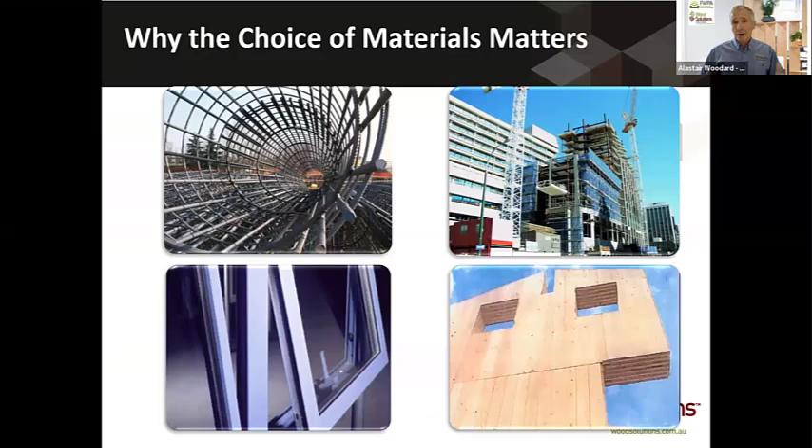So this question, why wood? Look, we're all building professionals. We all use a wide range of building products: steel, concrete, aluminium, brickwork, and of course, timber. And all of these products have one thing in common. They come from our one earth, and we really do only have one of these. And look, reality is in first world countries like Australia, we really do produce a lot of materials. We probably need, the pundits will tell us, 3 earths to actually provide the sort of consumption that we do at the moment. And that has an environmental impact in a range of different ways.

But I guess the thing that's taken the focus globally is this impact around carbon dioxide or CO2 emissions. And the building product sector is an important sector in terms of its environmental impact. Uses around 12 to 20% of water consumption, 25 to 40% of energy use, produces 30 to 40% of greenhouse gas emissions, and 25 to 40% of solid waste generation.

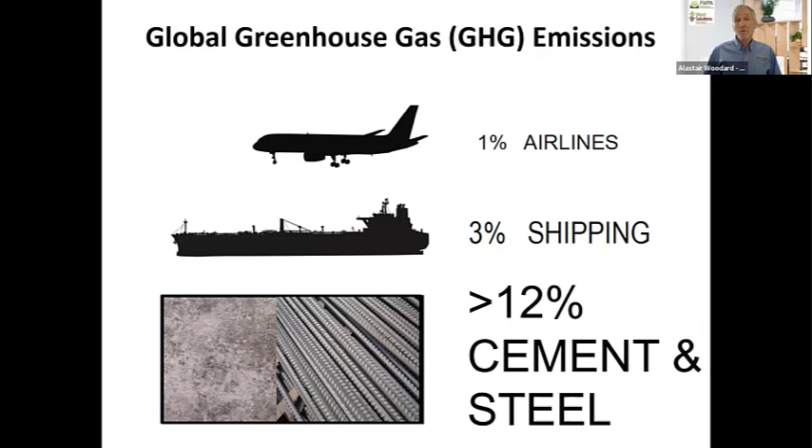It's interesting when we put some of this greenhouse gas emission in perspective. The airline industry is often bagged a little bit for its emissions, but it only produces around 1% of global greenhouse gas emissions, shipping 3%. The cement and steel sector alone produces 12% of global greenhouse gas emissions. So how we build is really important. And definitely in terms of a friendlier way we can do it, the use of bio-based materials such as wood is certainly a good option. As we know with wood, it's natural, renewable, biodegradable, recyclable, sustainable, and greenhouse positive. So it's definitely got a lot going for it.

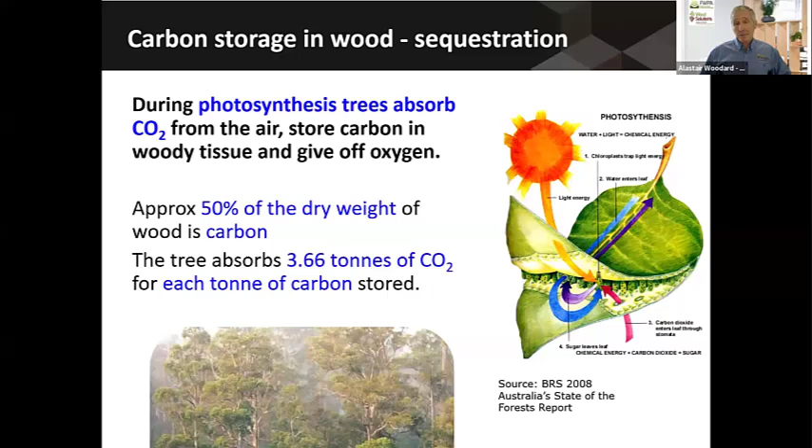You probably remember back to your high school science and the concept of photosynthesis. So what our forests and our trees do is they take that CO2 in the atmosphere, and using the solar energy of the sun, those leaves break down the CO2, they release the oxygen that we breathe, and they store that carbon in the woody mass of the tree. So about 50% of the dry weight of wood is carbon. So by example, if we use a hardwood that has a density of around 1,000 kilograms per cubic metre, around 500 kilograms of that is carbon. And if you multiply that by 3.66, that's how much CO2 is stored. So we really have a good story when we look at this timber and carbon cycle.

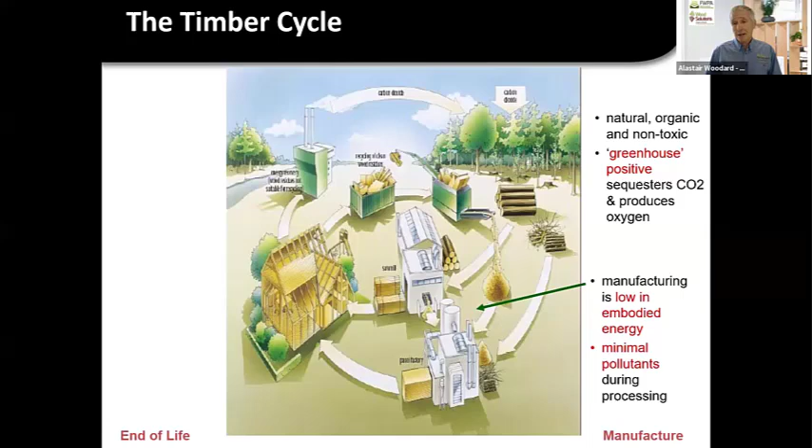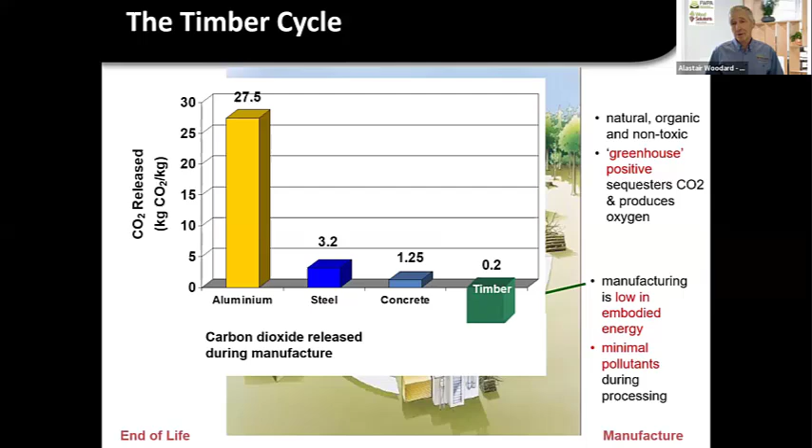As we mentioned, the forests are very greenhouse positive, sequestering that CO2. In terms of the production of timber, for most of you who've been to a sawmill, you'll see that they don't use a lot of embodied energy, very minimal amount of pollutants during processing. If we compare timber with other alternative materials, competitive materials, you can just see quite clearly by these graphs how much CO2 is released. And again, if you take into account the fact that those forests are storing that carbon, we really get a very different aspect compared to other materials.

But the other thing that people often overlook, but important to remember, is that those timber products continue to store carbon for their life. So if they go into a house, that house might last for 50 years, 70 years, 100 years, I don't know. There's plenty of timber buildings around the world over 1,000 years old. So as long as those products are being used, that carbon remains stored. At the end of that first life, when we deconstruct the building, we can do a couple of things. We can either reuse the products directly, like timber flooring or windows or doors, or we might recycle that into some completely new type of timber product.

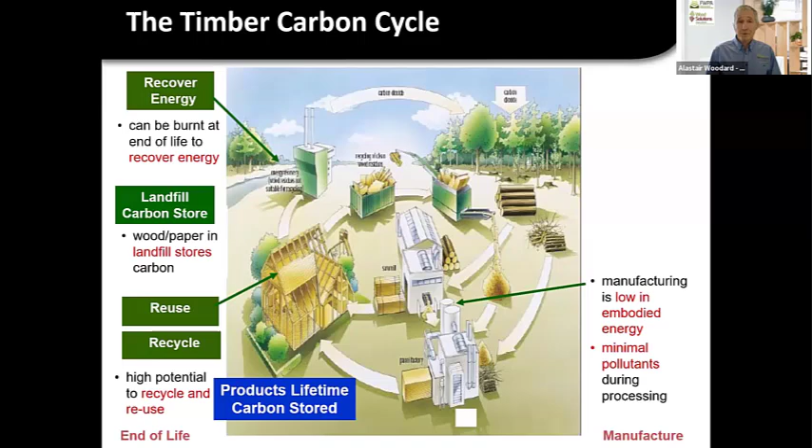And if at the end of the day we can't reuse or recycle it any further, we can do two things with that timber. If we actually store that timber in a landfill where there's no oxygen, that carbon will remain stored forever. It needs oxygen to biodegrade. But we really probably don't want to be sticking things in landfill. A better solution at this point in time, if we can't reuse it or recycle it anymore, is to actually burn that wood as a cogeneration fuel. So displacing a non-renewable fossil fuel like coal and using a renewable fuel instead. And that CO2 that's produced that goes back to the atmosphere is then reabsorbed again by the trees. So we get this really nice carbon cycle where the carbon's just cycling through different types of applications.

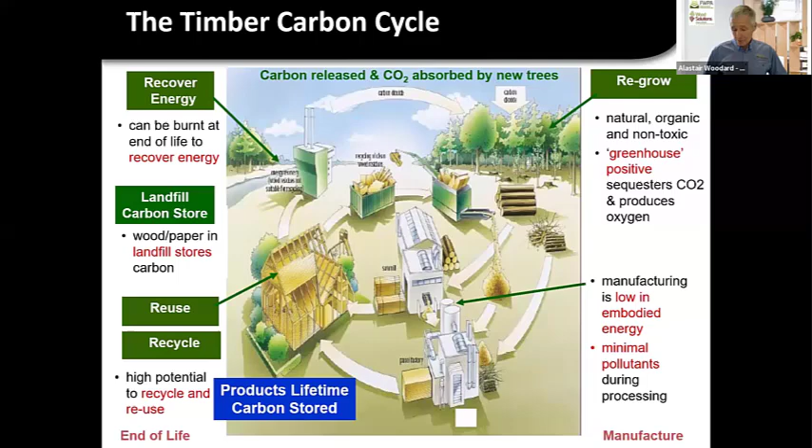Now, there's a massive interest at the moment in the embodied impact of materials. As you probably know, the federal government's got a net zero by 2050 policy in place. That's their aspiration. And there's whole different groups trying to work out how they assist with that. Certainly building is a big area.

So the building ministers met just last month, and they've actually all agreed that by NCC 2028, they want to include embodied emissions impacts of building materials, which is really fantastic. And that'll happen probably in the commercial sector through NABERS and the tools that they've got, and in the residential sector through the NatHERS scheme that we use at the moment.

And I'm sure a lot of you are aware, if you're interested in this area, that there's a whole range of other organisations, the Green Building Council, ASBEC, a whole lot of voluntary organisations that are also very focused on embodied impacts of building materials. A lot of you are probably also aware of MECLA, the Materials Embodied Carbon Leaders Alliance, which has brought together all of the major companies in the commercial and a lot in the residential sector to focus on driving down embodied carbon in building materials.

And they have a series of different working groups. And one of those is actually specifically looking at engineered timber. So if you're interested in this, feel free to join up. Also, WoodSolutions has got a number of good documents you might be interested in. Technical Design Guide number 55 in particular, I'd encourage you to download. And if you want some more information around carbon and forests, FWPA have also got a number of good documents there, all available from the WoodSolutions website.

If you're a bit of an embodied emission aficionado and you want more information about it, WoodSolutions also now has a database of all the timber-related embodied emission data. They pulled that together from all of the different environmental product declarations into one source. So please have a look at that too if you have any interest in this area.

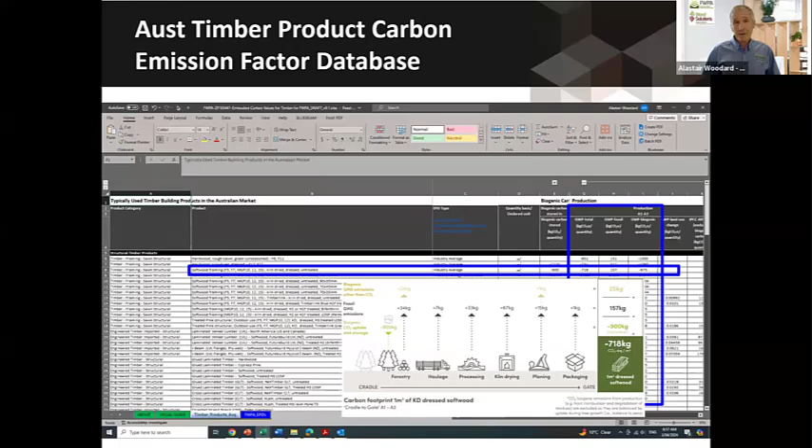But look, we're looking at new systems and new opportunities. It really is all about engineered wood products going forward. And this is a nice little quote from Alex de Rijke, who was head of the School of Architecture over in London: if the 19th century was the century of steel and the 20th the century of concrete, then the 21st century is about engineered timber. And this interest in embodied emissions is really driving a lot of this interest at the moment.

At a high level, we can separate our engineered wood products into these 5 different categories: those produced from solid wood, veneers, strands, particles, and fibre. Our solid wood products tend to end up in things like framing material, beams, columns, those type of applications, maybe the lightweight area. And then we also have our mass timber systems.

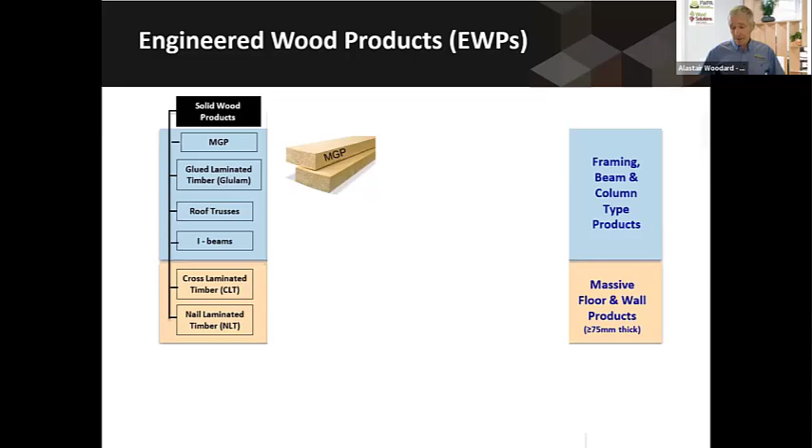Under our solid wood products, obviously our machine graded pine, which is used in probably all our lightweight timber framing. And every stick of this is really engineered. Every stick of timber produced goes through a proof testing machine before it's stamped and graded and sent to the marketplace. That MGP in its sawn form can then be used by the frame and truss sector to produce roof trusses, open web joists, those type of things.

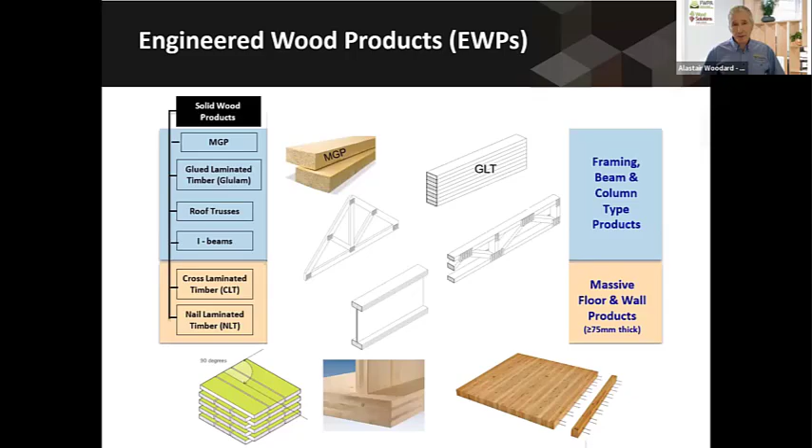We also use that type of product to produce bigger materials such as glue laminated timber, or even use it in things like I-beams. And with our mass timber products, it's not just about CLT, there's also other things like nail laminated timber. I'll cover a little bit more of this shortly, but our other speakers are certainly going to talk about some of these different products that are out there.

With veneered products, our main one from a structural sense is laminated veneer lumber, which is produced in sheets up to around 1,200 millimetres deep for billets, so we can cut all different sizes out of that depending on the application. Also these days you can get cross-banded laminated veneer lumber if you're using it in big panel sections, to give it some level of stability.

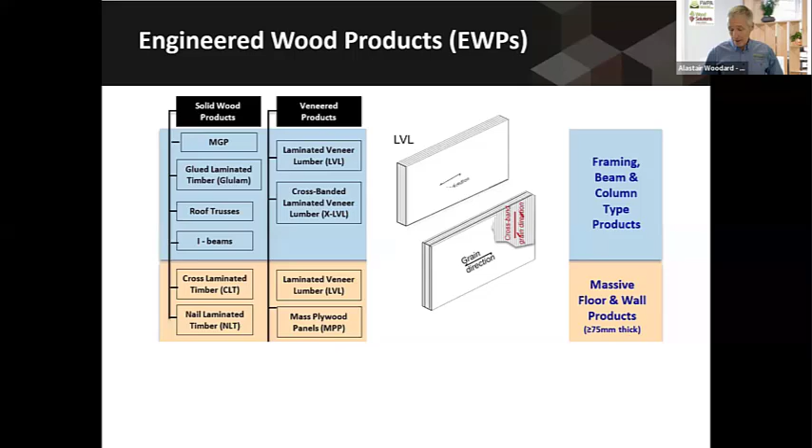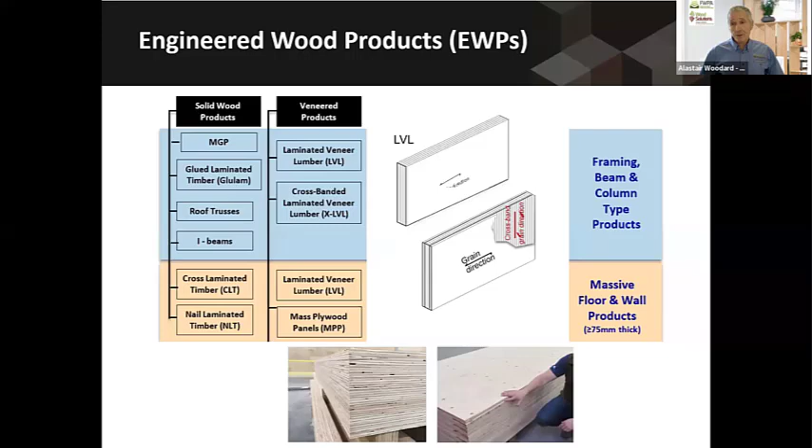And then quite a bit of interest these days right around the world, but particularly also here in Australia, around mass plywood panels as an alternative to some of the mass systems such as cross-laminated timber. And then look, there's a range of different strand products which are really interesting. I'm not sure how many of you have come across parallel strand lumber.

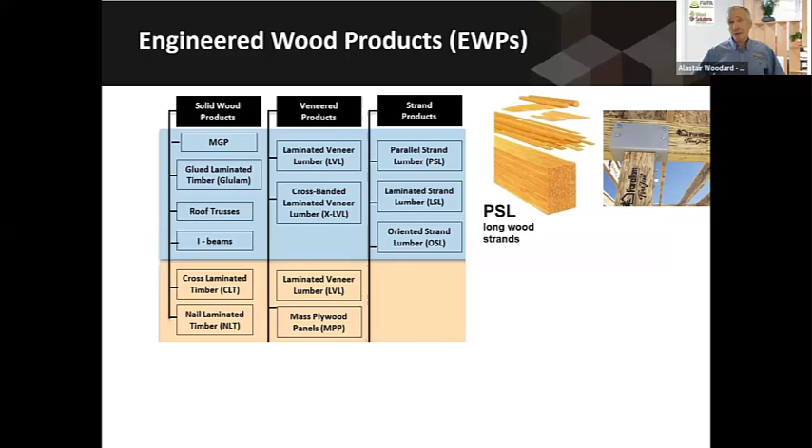This was interesting because this technology was actually produced in Australia back in the late 80s, a product called Scrimber. I don't know if many of you remember that one. It was produced by SATCO, the South Australian government, but we couldn't commercialise it here in Australia back then. And this technology went to the US, where it's now marketed as a product called Parallam, where these sort of great big engineered wood products are available. So basically crushed fibres all glued back together.

There's also, in terms of the different strand lengths, 2 other products: laminated strand lumber, which uses more short wood type strands. And again, we're developing some of that technology in Australia here through a company called Lignor. And then there's a product that uses flaked oriented strand lumber. So 3 different strand type products, which are more used overseas, but I think we'll see coming into Australia over the next few years.

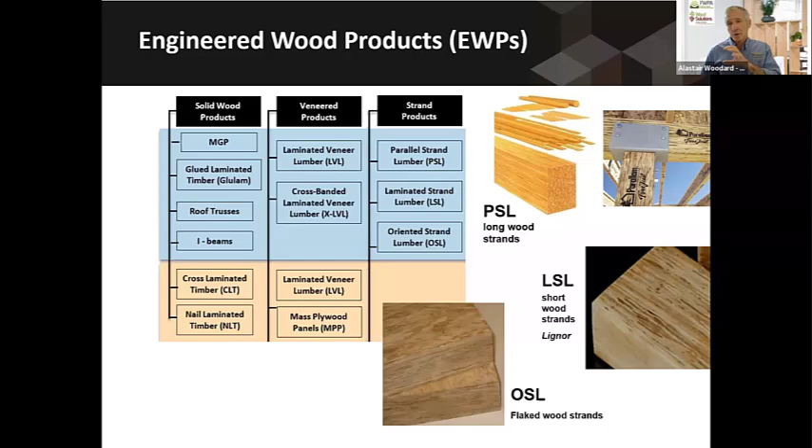And then in terms of our panels and bracing type products, obviously plywood is one we use quite regularly, but others you might not have come across, or you're starting to see, are things like oriented strand board. So again, sort of flakes of timber all laid up in specific layers to give a panel type product. And then obviously products with different types of particles, things like our particle board flooring, the yellow tongue, or the finer particle in products like hardboards and fibre boards.

So looking at supply, that's quite interesting. We've probably got a fairly convoluted downstream supply channel that includes both local production and imports. These days, in terms of how that comes to the market and looking at some of these applications where the product ends up, certainly with our detached 1- and 2-story homes, which is where a lot of our timber goes, a lot of builders still choose to stick build on site.

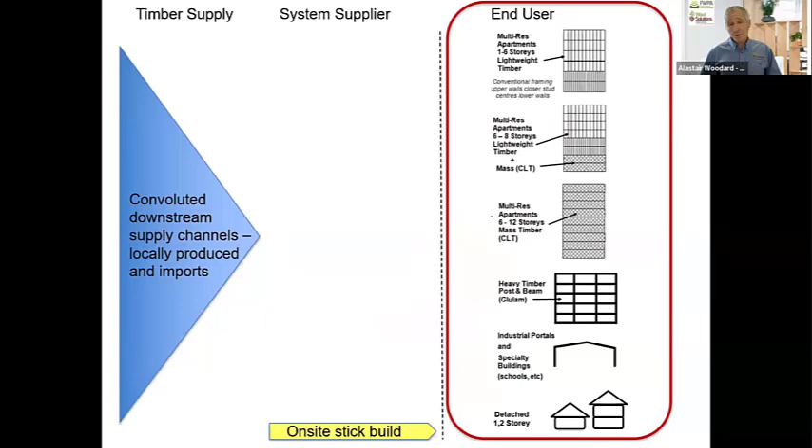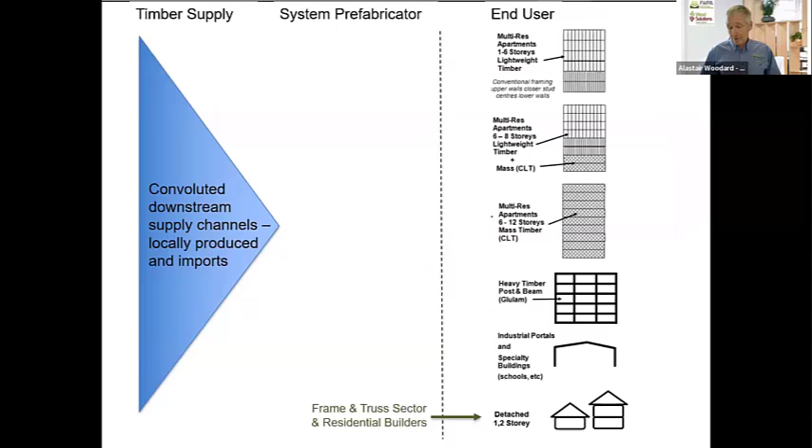But the push really is across all of these type of applications these days to some type of prefabricated timber system supply. And so when we look at these again with our detached 1- and 2-story market, that can either be a residential builder, sort of stick building on site, but predominantly these days materials supplied from the frame and truss sector. If we're looking at different end user products such as industrial timber portal frames or specialty buildings such as schools or heavy timber post and beam structures for offices and things, that tends to come from specialty timber fabricators or the glulam manufacturers.

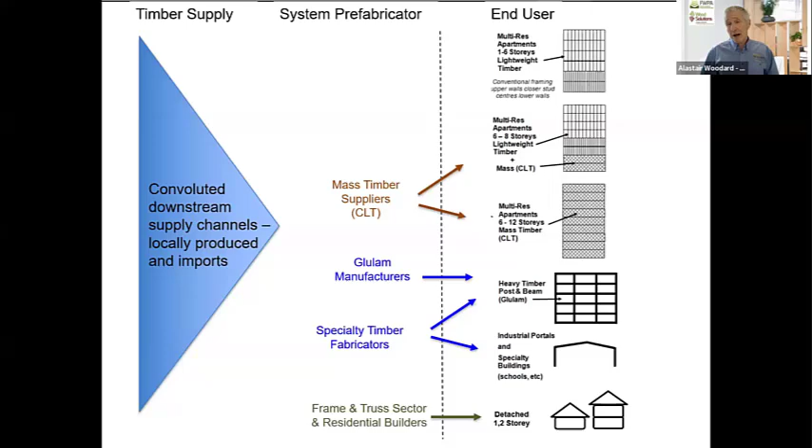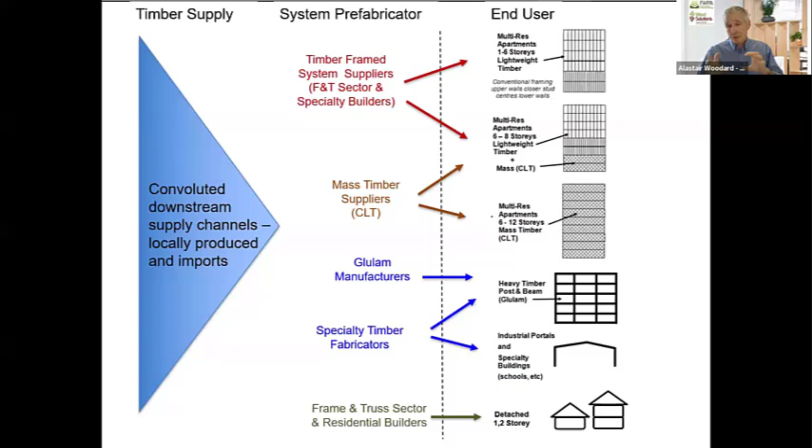Then as we move into our multi-res apartments, so the taller ones, 6 to 12 stories or more, that will tend to be supplied by the mass timber suppliers. And if we're talking about a lower level apartment that might be, say, up to 6 stories, where lightweight might be more effective, that can either come from timber frame system suppliers within the frame and truss sector or from specialty builders. So different ways these different products come to market.

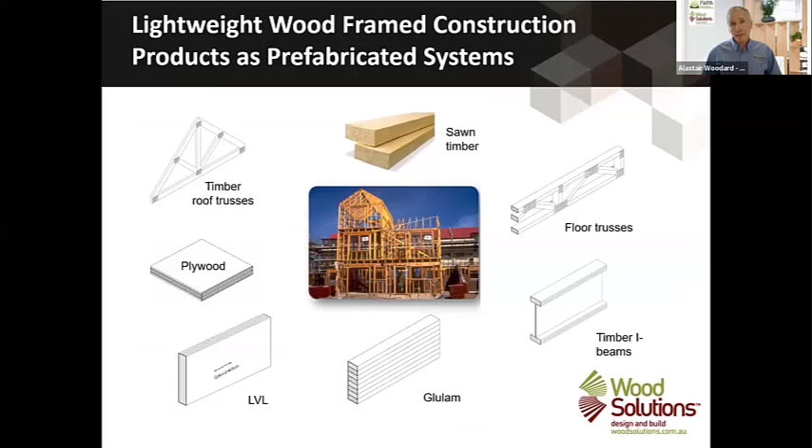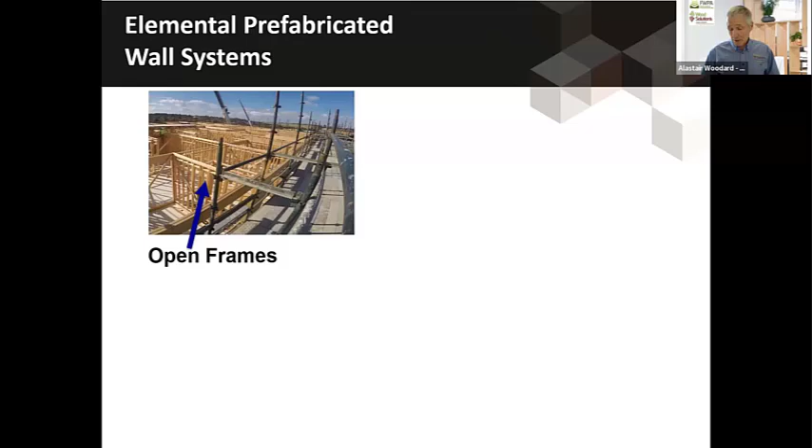So quickly then, just sort of looking at some of the different products out there, we spoke about all these sort of individual products that you can get these days, but these days they're really supplied more as prefabricated systems. So if we're talking walls, for example, we often talk about this elemental prefabrication. So we could be taking a basic open prefabricated wall frame that we build most of our houses and townhouses out of, and we might start to add elements to that. So we could be adding the vapor barrier in the factory, we could be adding the windows in the factory, could be adding some sort of sheathing.

And that is just sort of making it simpler, improving the productivity for builders in terms of the speed of construction on site. Or we could be doing fully closed prefabricated walls where you've got an external cladding and internal lining and maybe even electrical and plumbing; walls can be supplied these days.

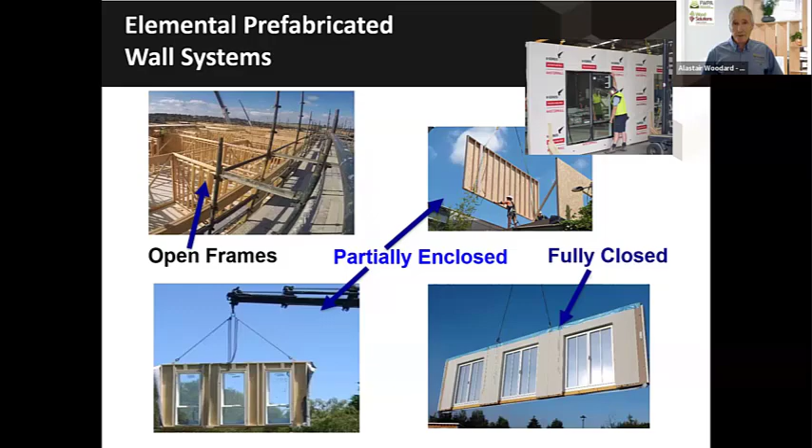The real benefits are how quickly you can install these systems. So particularly for townhouses and apartments where you're getting repetition, very cost effective and speedy, and really does reduce that sort of risk of fall from heights for workers. So a really good OH&S benefit as well.

In terms of roofs, we also obviously supply a lot of open roof trusses, both to the commercial and the residential sector, but there's no reason also why we can't do roof cassettes if we need to get that speed of construction on site. You see a lot of cassettes used overseas, particularly in countries that have short build periods, but we do certainly also see roof cassettes used in Australia.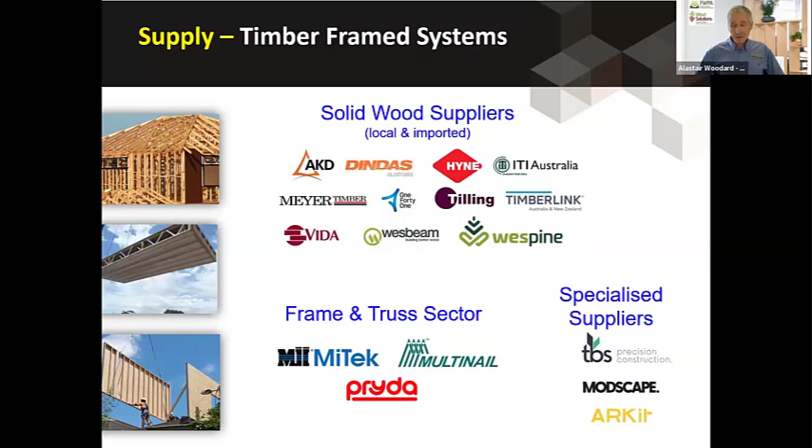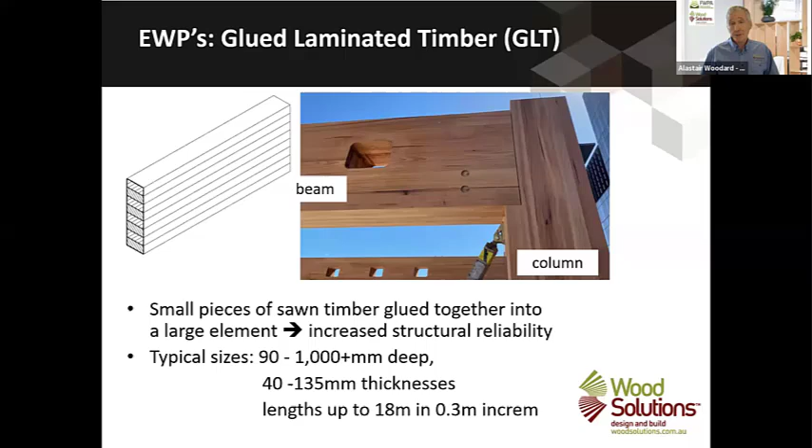In terms of our mass wood frames, so particularly glue laminated timber, in effect, what we're doing here is taking small bits of wood, maybe finger joining them together to make them longer, gluing them together to make deeper. These days we can get glulam beams in Australia up to around a metre deep, so really quite substantial. I know Jeremy and Chris are both going to talk about this coming up, so I'll leave them to speak about their respective products. But in effect, there's a range of different glue laminated timber grades out there, and generally that's dependent on the species they're made out of.

In terms of supply of glue laminated timber, we have quite a range of Australian suppliers now. And as I say, Next Timber and Ash will be talking about some of their products today, and a range of different importers that all supply glue laminated timber now into Australia.

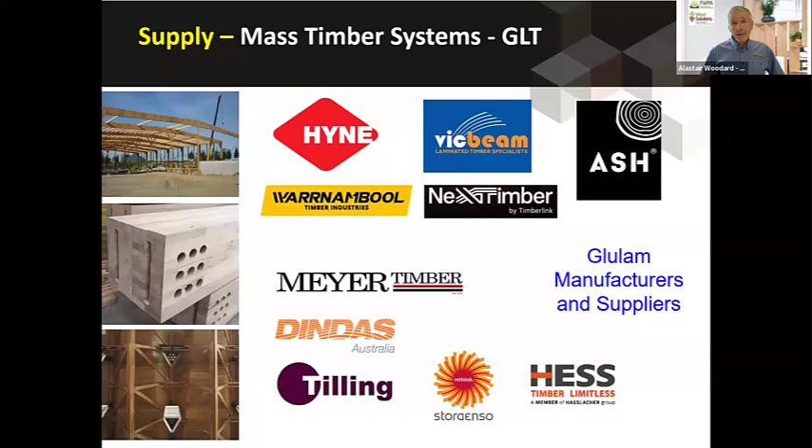Timber concrete composites is another really interesting area, and Chris is going to chat a little bit about a product that Ash is producing here. But in effect, what we're doing is, from an engineering perspective, trying to get the best out of 2 different materials. So when we do mass timber buildings, or mid-rise timber buildings, one of the benefits of concrete is its acoustic performance because it's quite dense. So when we're doing those type of buildings, we can use a timber concrete composite to actually reduce some of that acoustic issue and control some of that vibration. And at the same time, we get the benefits out of the compressive strength of concrete and the tension strength of timber. So quite creative ways of mixing materials for the best application.

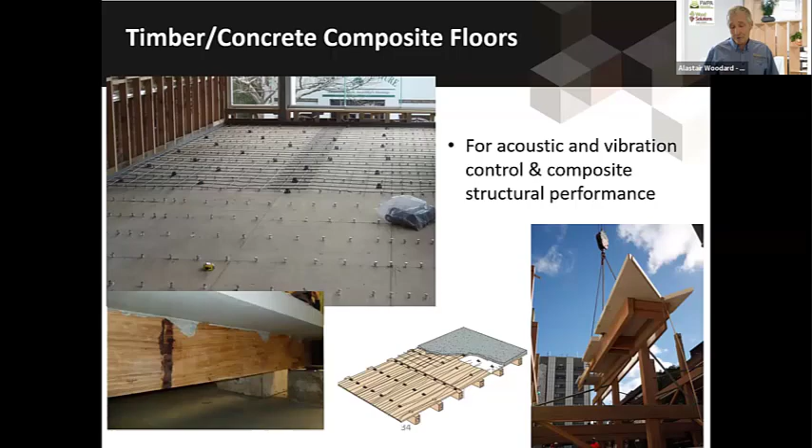In terms of our mass wood panel systems, the NCC describes anything over 75 millimeters thick as a mass panel. So that could include laminated veneer lumber, cross-laminated timber, nail-laminated timber, or dowel-laminated timber.

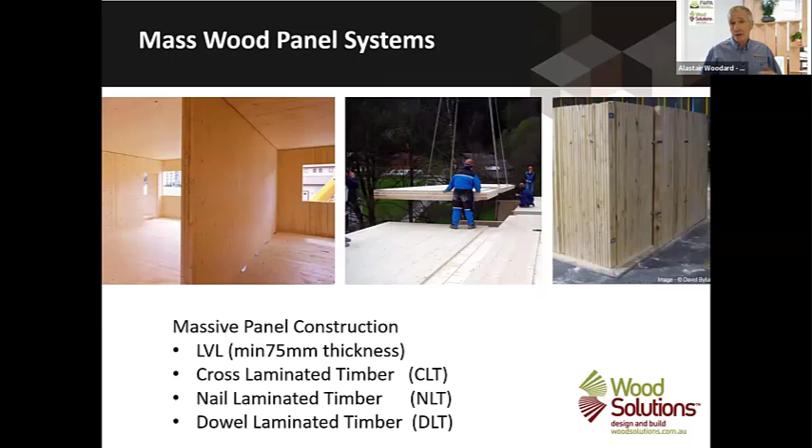And in terms of supply, we have 3 major manufacturers now producing CLT in Australia, which is great. So XLAM has been around for a little while now, Next Timber, which is now in the market, and Jeremy will talk about that shortly. And then also CLTP Tasmania that produces a hardwood plantation CLT product. And again, a number of different importing companies from Europe and then more so these days from North America. So a range of ways you can get CLT today.

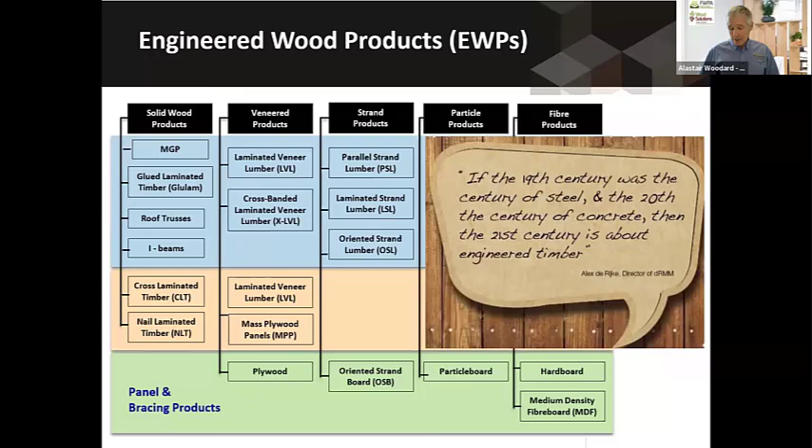So as you can see, there's a whole range of different engineered wood products out there at the moment for you to choose from. If you want to get some more information about all the different products, I'd certainly encourage you to have a look at WoodSolutions Design Guide number 46. This is freely available from the WoodSolutions website. Just grab that. It'll tell you all the types of products and where they're used, and has some great little comparative span tables in there for some preliminary sizing.

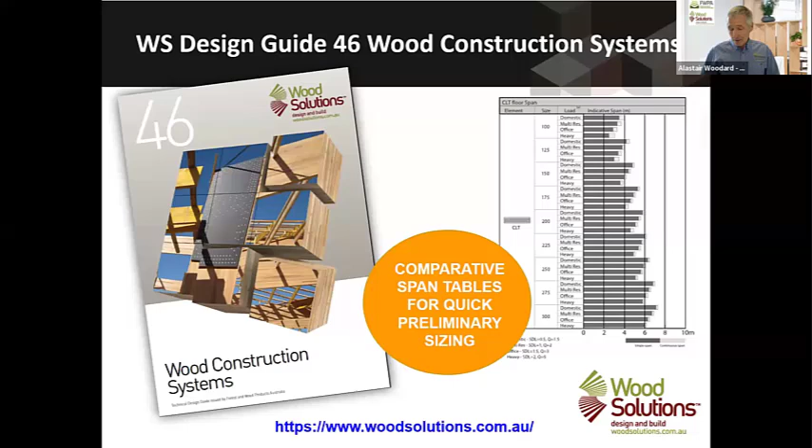So that was a very quick introduction, and what I might do now is stop sharing my screen and hand over to Jeremy, and he'll take it from there.

So I just want to quickly talk about market trends. So with regards to the CLT market, the US market is expected to double in the next 5 years. We've actually seen similar trends in Europe as well.

So I think this is sort of emphasising the rise of demand for buildings with low carbon footprints. And there's also a bit of a growing demand for more advanced adhesives in this space. And we're starting to see some of these trends creep into Australia.

So I'll just start by introducing who Timberlink are. We are primarily a softwood manufacturer. We've been in existence for about 10 or so years. We've got a plant in South Australia and in Tasmania as well. The Next Timber plant is actually located just out of Mount Gambier in Tarpeena. And we have distribution centres all across the southern states of Australia, as well as some in New Zealand too. The products we primarily have sold to date have really been around the framing market.

So we started off as a softwood framing business 11 years ago, and we started producing engineered wood products middle of last year. The genesis for this was really around the responsibility for us to make best use of fibre and residues within all our timber products. And we actually commenced commercial operations of our wood plastic composite range in addition to CLT earlier this year. But I'll predominantly just talk about CLT for the remainder of this brief presentation.

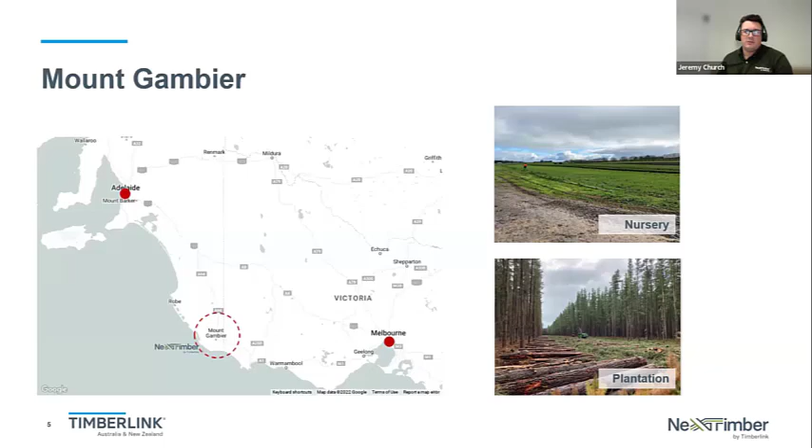Some glitches here, Alastair. Okay, back up running now.

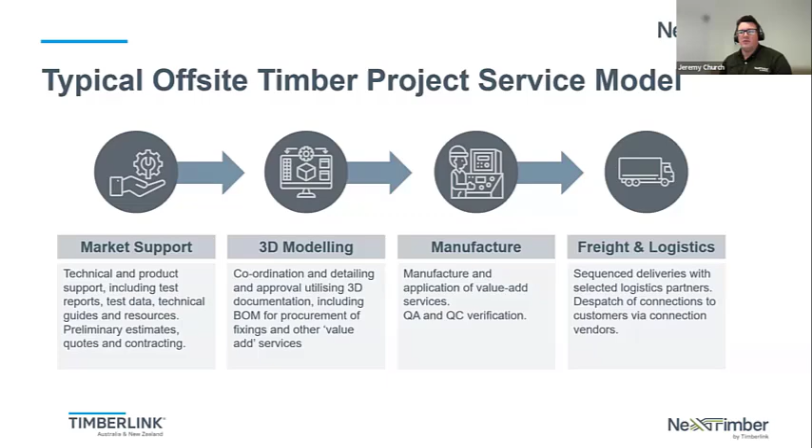So let's run through quickly what a typical offsite timber project service model looks like, irrespective of which manufacturer makes them. We provide market support. We've got sales engineers out in the market communicating with architects, engineers and specifiers to help them with their projects. Then we move to a process of 3D modeling, which we do predominantly in-house, and we'll develop a bill of materials for all the products, including screws and fixings or any other components we're supplying with the project. We then move to the manufacturing stage, and we also manage the freight and logistics to the site via various connection providers or third-party distribution partners.

We can make CLT panels that are 16 meters long, 3.5 meters wide, up to 360 millimeters in thickness. We edge glue our boards. We sand all our panels. And with our glue laminated timber products, we can make 12-meter long beams up to a meter in depth. We use feedstock widths ranging from 65 millimeters to 135 millimeters. We process them all through a planer, so they're all dressed all around. And we can provide them with or without arrises.

As part of our service model, we also provide the fixings, brackets, components, and any other value-add items the customer may want, which include things like temporary membranes and end grain sealers. The important point to note here is that all the offerings we provide may not be the same as what all other manufacturers provide.

So they do vary from supplier to supplier, particularly the value-add components. But even some subtleties around what lamella thicknesses manufacturers use can vary, same as board widths, whether they edge glue or don't edge glue, what types of adhesives they use, what grades of feedstock they use, but also things like certification, treatment, chain of custody. Those are all variable within the supply chain.

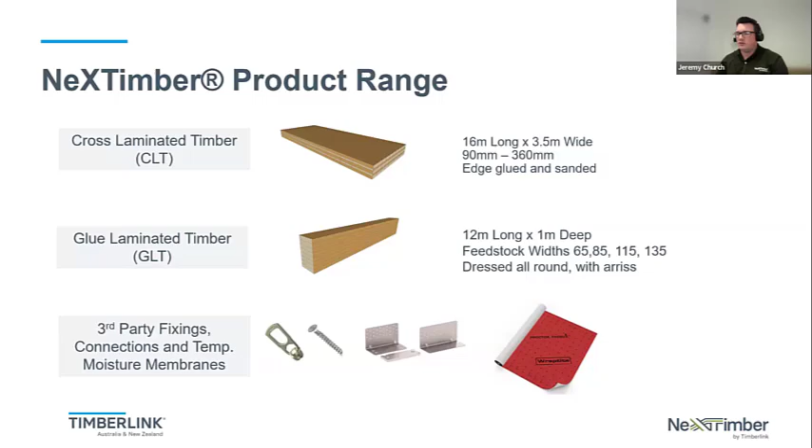So I dare say that if you're engaging with any supplier, just really probe them and ask them what the differences are between their products and the competitors', and make sure you're comparing apples with apples. One key difference for us as a manufacturer is the technology that we use. We use a melamine adhesive that cures under radio frequency, so it needs an energy input in order to activate the adhesive. So our press is a radio frequency press, a little bit similar to a microwave, but not quite.

We lay the boards up mechanically, so multiple layers, could be 3, 5, 7, or 9 layers, and we alternate the direction of each layer, and we apply a layer of adhesive between each layer, and then that goes into the radio frequency press, and it presses them in section by section as the actual CLT panel or GLT beam moves along. This varies from supplier to supplier. Some use it, and it's all really dependent on what type of adhesive they use.

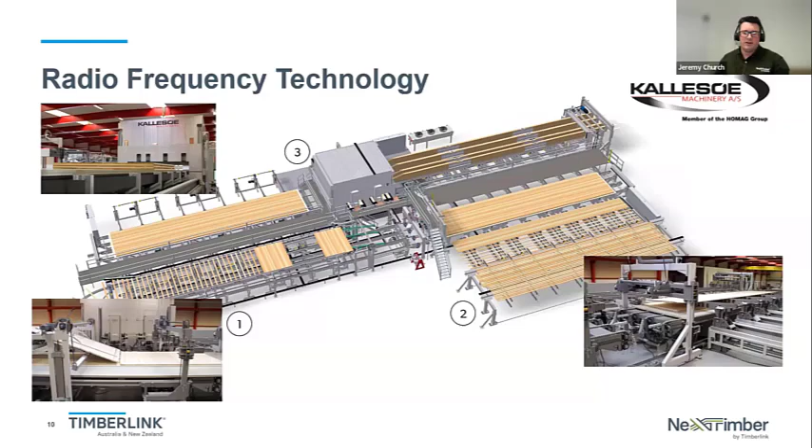What we do from a technology point of view is we have the ability to import models from third parties, or we can develop them in-house from engineering and architectural drawings. If we are importing, and this will be the same for most manufacturers, external models do tend to come with some challenges. The geometry is typically retained, but the translation of data can be a little bit clunky. So if you're going to generate your own models, run some tests and trials with your supplier before you actually go down that path.

It generally does require some rework and manipulation on the manufacturer's end, typically due to things like tool assignment, tool limitations, and what can actually practically be machined. So there may be some changes that need to happen there. Most manufacturers will prefer to do probably the last 50% of the detailing themselves. This includes things like putting in lifting points, looking after the loading drawings, any QA documentation. So if you are going to go down that path, be rigorous and get your scope right with your manufacturer first.

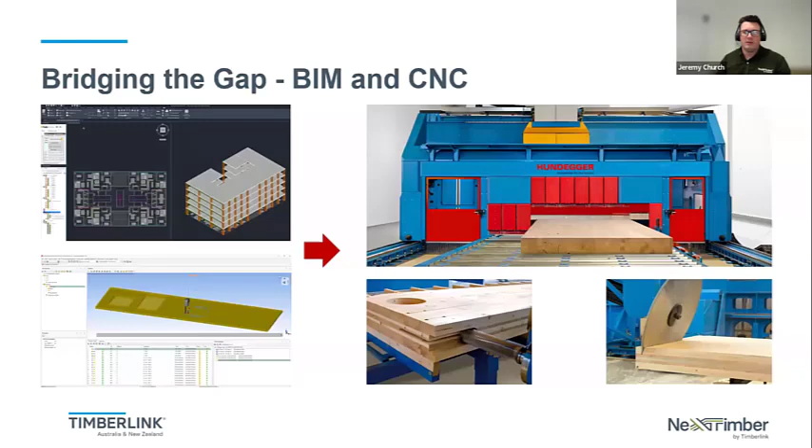When it comes to compliance, generally speaking, if you're going into large commercial applications, you're going to need certification with regards to fire performance. Our products have been tested through Warrington Fire, and we've got test data to support both products that are wrapped in fire-rated plasterboard, so encapsulated, or bare, where they don't have any fire-rated plasterboard on them. So we've got test certificates for both of those.

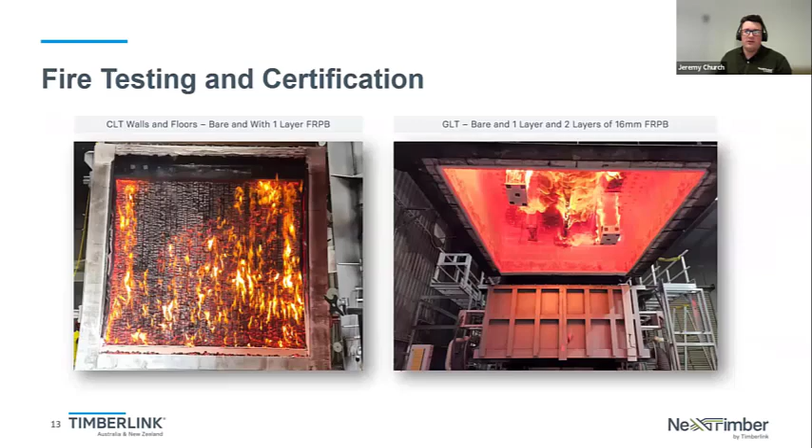But the point I really want to make is that with fire testing, not all things are created equal. Suppliers can't generally swap in one adhesive type or a better performing adhesive for another one. They're usually set up to deal with one, plus they won't necessarily have the testing certificate to justify substituting one in or out. The adhesive that we use is a melamine adhesive, which means it doesn't degrade at heat. So it gives you a product that won't delaminate as the fire gets through to the glue line, so it retains its glue line integrity.

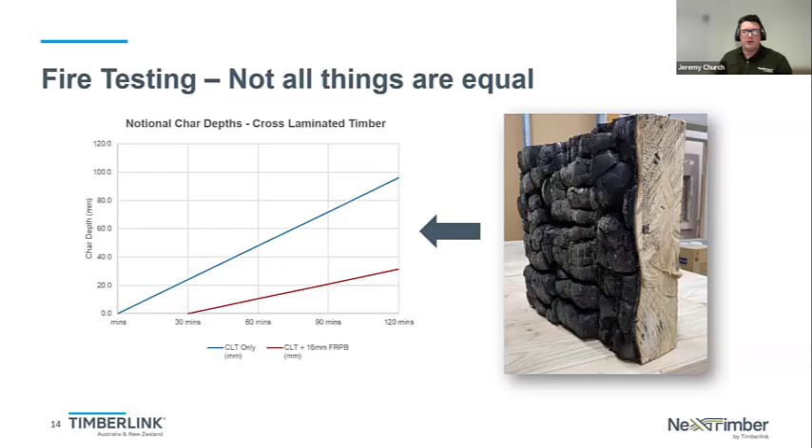Also, the lamella layups influence the overall fire performance, and those can also differ between suppliers. So engage with your supplier and look at their test data and what they have to offer in that space. With regards to fire performance, as I said, we have solutions with our fire plasterboard. We also have DTS and performance solutions up to 3 hours. And we also have tested passive fire solutions with some supply partners, so fire collars and fire stopping solutions and things like that.

These are accessible via design guides, test reports and test certificates, all available on our website. So if anybody needs those, feel free to reach out and download them. And with regards to acoustic performance, we've also spent a reasonable amount of time down at CSIRO in Clayton doing a whole bunch of testing with them.

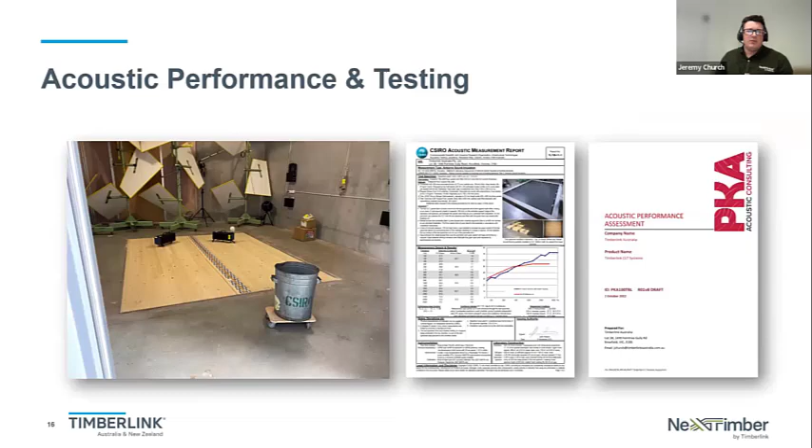Acoustic performance is typically critical for residential type applications. We've tested tens of different solutions in that space. They are available through our literature, through our guides, but we've really focused on having expressed soffits for CLT construction. So there's some solutions available there. Also, WoodSolutions Design Guide 44 has a whole host of solutions available, which are fairly generic and supplier agnostic.

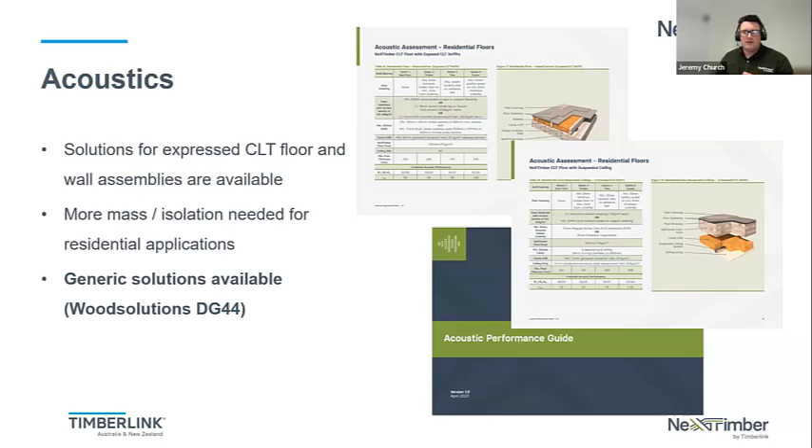But one thing I want to talk about with regards to CLT is some of the opportunities that really present themselves in the market. I started this presentation with a brief synopsis of what's happened in the US and European markets with regards to growth in those sectors. But I think there's a really big opportunity in the Australian landscape to look at how we actually leverage our existing supply chain. So we can use things like cross-laminated timber to partner with lightweight timber framing to build buildings that we would typically build in more traditional styles.

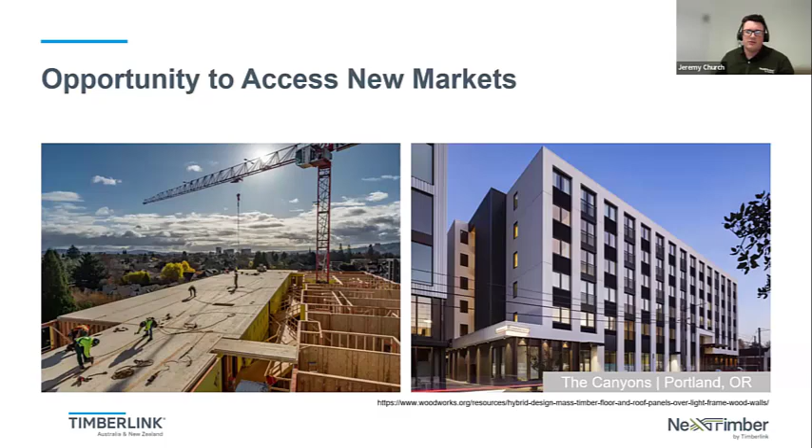In this example here, this is one out of Portland, Oregon. There's a whole host in the US. Lightweight timber frames, CLT floors, and it really is becoming the normal method of construction over there. So there's an opportunity for the Australian market to really grab this and embrace this technology. We can utilize the existing capabilities of the frame and truss market. We can also reduce the freight costs and CO2 footprint by building our wall frames closer to the construction site.

We've got supply partners with regards to frame and truss manufacturers and the connection suppliers, the nail plate providers, etc. Those are all very well established in the Australian market. We just need to pull it all together. Now we have two high capacity softwood CLT manufacturers in Australia, so this solution is somewhat supplier agnostic. They can already supply into this market segment. And we've got multiple frame and truss manufacturers very close to where the high density housing needs to be. So there's a really big opportunity for this segment to embrace what's happening overseas and bring it into Australia.

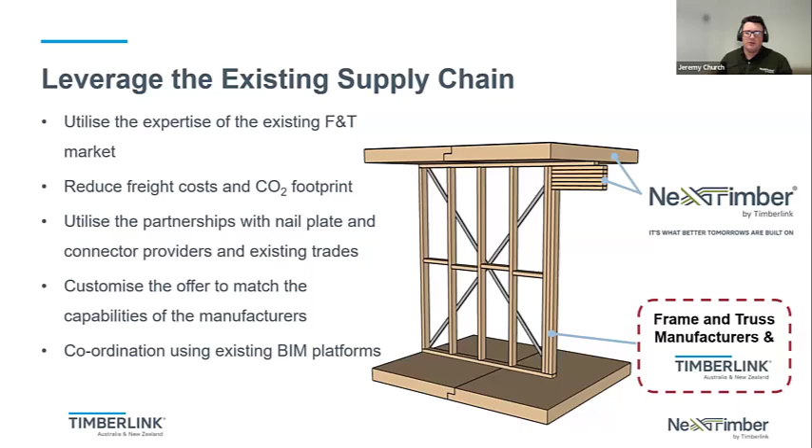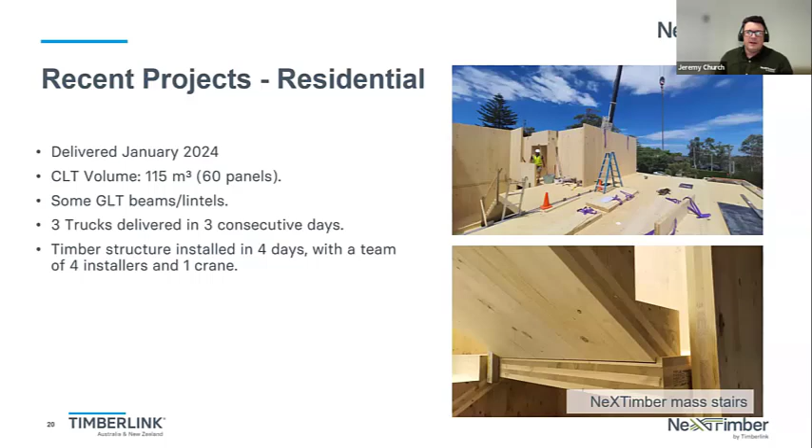If I look at some of the past projects that we've done, as I said, we started producing CLT panels and glue laminated timber products in the middle of last year. This year we delivered one of our first projects, which was a residential project in New South Wales. You can obviously build stairs, walls, floors, all those sorts of assemblies using cross-laminated timber. And we've also recently delivered a number of commercial projects and are in the throes of delivering a few more. This project here is quite interesting. This is one done up in Sydney.

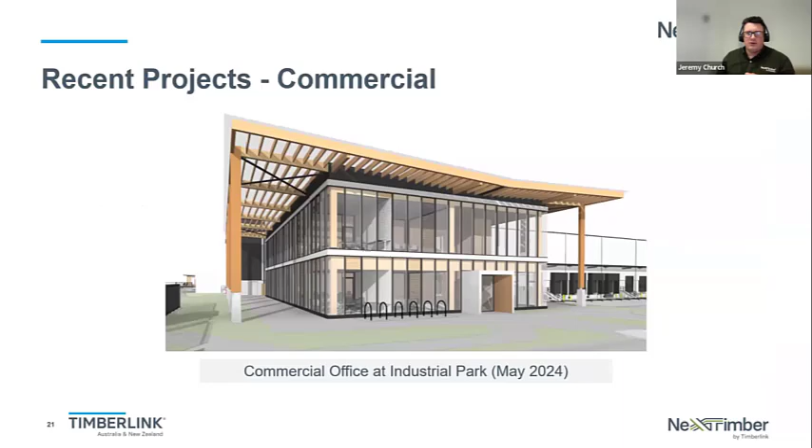It actually had three timber suppliers on the one project. We were supplying the cross-laminated timber, Ash was supplying the glulam, and Hyne actually supplied some of the glulam on the external facade. So we really played to the strengths of each of the suppliers to collaborate together and pull together a really good outcome for the client. It also had factory applied membranes and some of those other value add items to take a lot of that work away from the construction site.

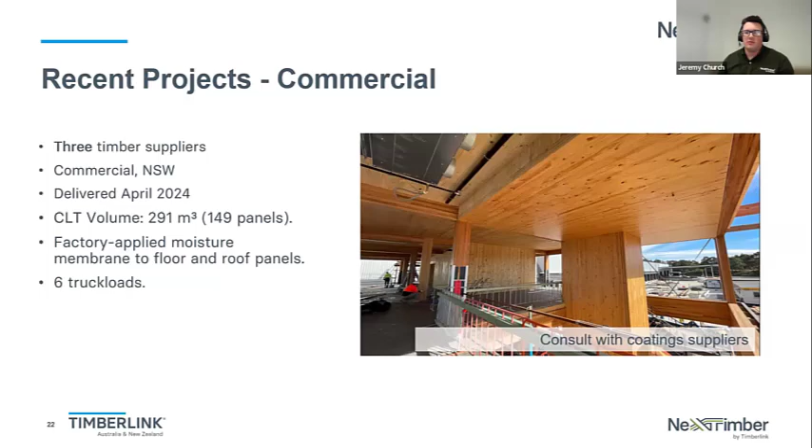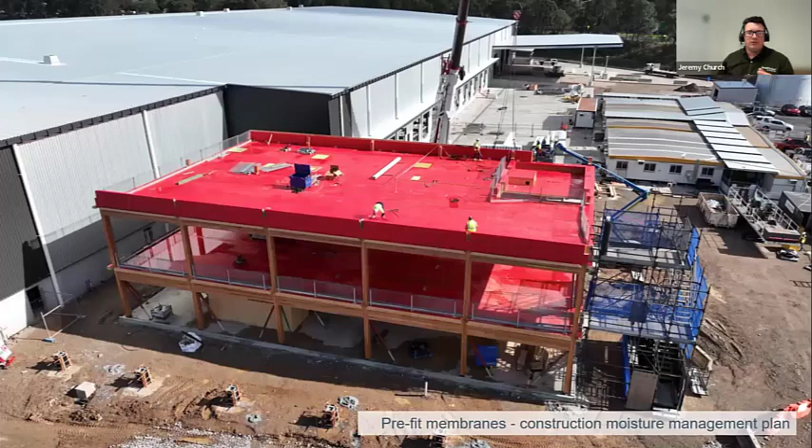A lot of collaboration and service coordination was required for a lot of these projects, as they always are. As I mentioned before, there's the opportunity to pre-fit some membranes to do some value add and really manage that moisture on site. That's becoming more prevalent these days with contractors really putting a lot of emphasis on protecting the timber. As a manufacturer, it includes the placement of pre-fitted temporary lifting solutions. That's usually coordinated through the shop drawing process.

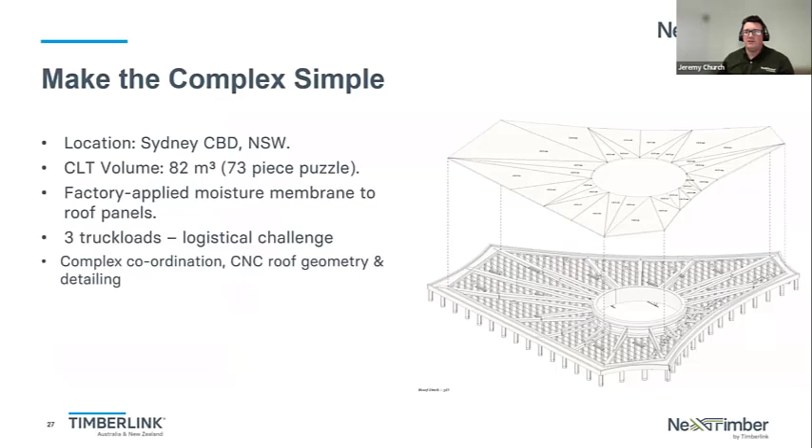And another internal image. Another project I'd like to talk about is a project up in Barangaroo, in Sydney. The emphasis of this one is really making the complex simple. The project went through a bit of a journey, but it really was about pulling together a bit of a jigsaw puzzle. It actually went together on site relatively straightforward, but it required a huge amount of coordination through the design team and through the shop drawing phase in order to get that outcome. So that's one that we're pretty proud of.

These are some of the panels that are going in. You can see the amount of machining that had to happen. We were actually able to apply some manufacturing principles in here to streamline that. Although it does look complex, we were actually able to simplify it.

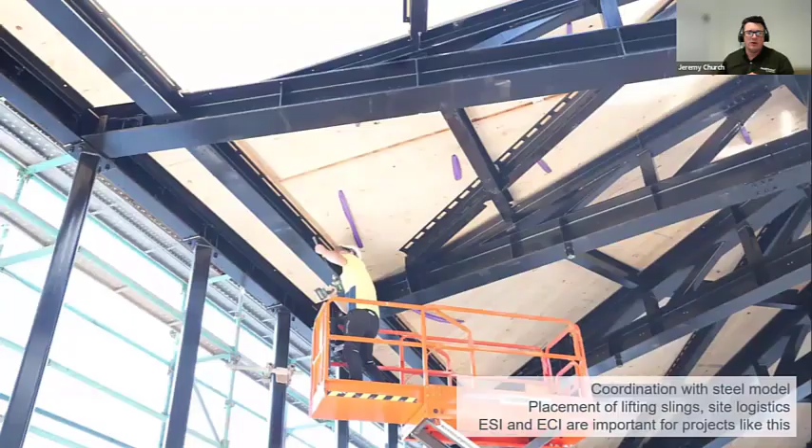So that required, as I said, input from across the board. And same with lifting points, we had to coordinate that with the steelwork too. So a bit of a challenge there.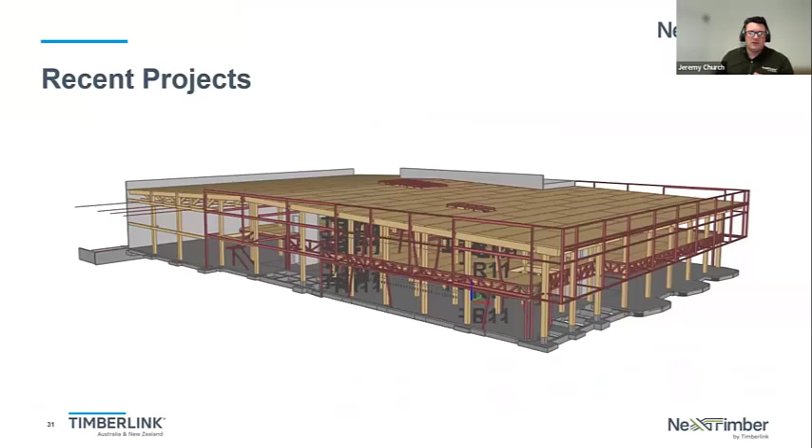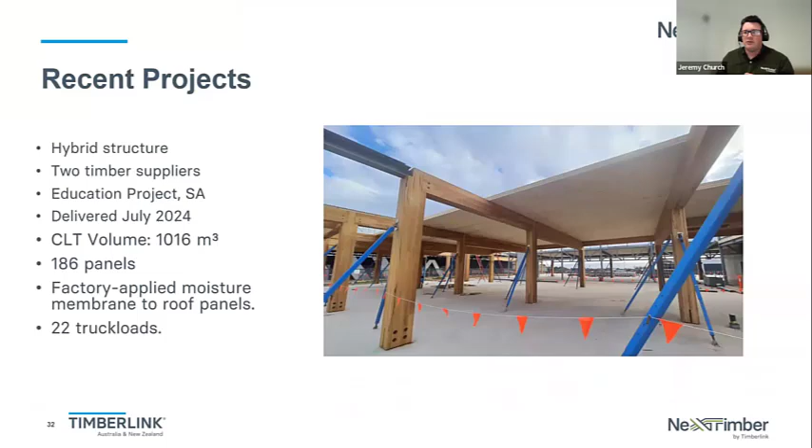This is another project that's going up in South Australia at the moment, a hybrid structure to some degree. It's got concrete, it's got steel, it's got CLT, it's got glulam, it's got a whole host of different things in it. It has 2 timber suppliers working on it together. So Ash are actually supplying the glulam, we're supplying the CLT. Once again, another high level of coordination and collaboration on this piece of work, which we're all very, very proud to work with. Some images there that we can see.

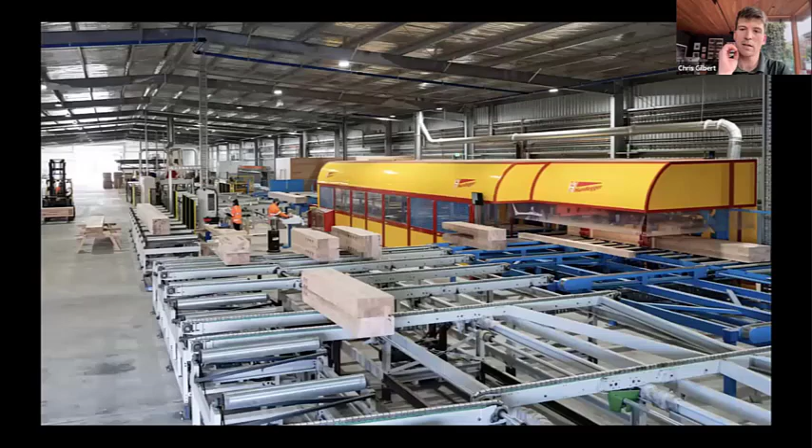This is one of our K2 Hundeggers. So this machine is over 30 meters long. It's really great at doing these, well, I'm going to say simplistic, but traditional kind of post and beam connections. We also have a new saw, which is a Robot Max, that really lets you unleash a lot of complexity, which is quite exciting.

So the products that we will talk about today: Masslam 33, that's just finger-jointed plantation hardwood laminated together. 38 is where we laminate in one direction, then the other. We use that for columns and beams. 33 we use for rafters and purlins. And then ATC is when we're combining all three things, so 38, 33, and concrete, to create a hybrid system.

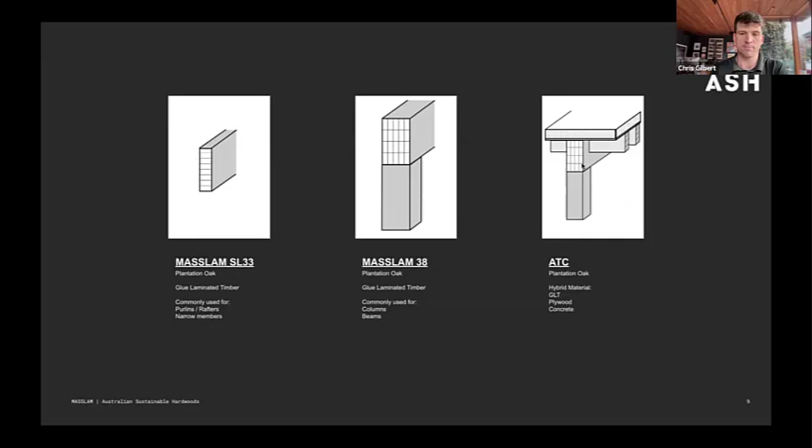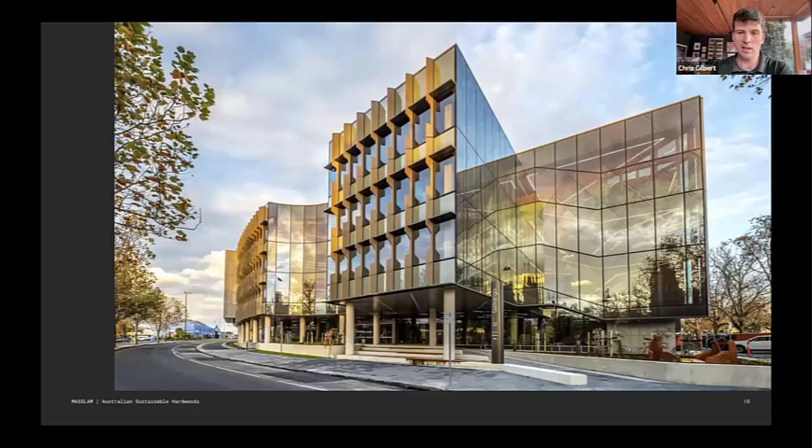So just a quick background of the projects that we've delivered with Ash that have used 33 and 38. So this is the Bendigo GovHub. This is a great project by Architectus, Macquarie University, Westfield Knox. And then I thought I would show some of the work that I've done with Ash. So this is a project called Off-Grid House. All of this is Masslam.

So Ash timber composite, I could talk all day about this. I'm quite excited by it. So this is a fully fire-tested solution. We can build up to 12 levels and expose all of the timber, and it's carbon neutral. And the timber that it is using has been upcycled from a plantation forest. So it's all good news stories.

So this is how it looks in the end. As I said, up to 12 levels. It's really traditional post and beam construction with exposed joists. But what we do is we supply it as panels, 1800 wide, with plywood on the top. And then we use shear connectors to attach a really lightweight mesh to the top of that, and then just pour 25 MPa concrete over the top.

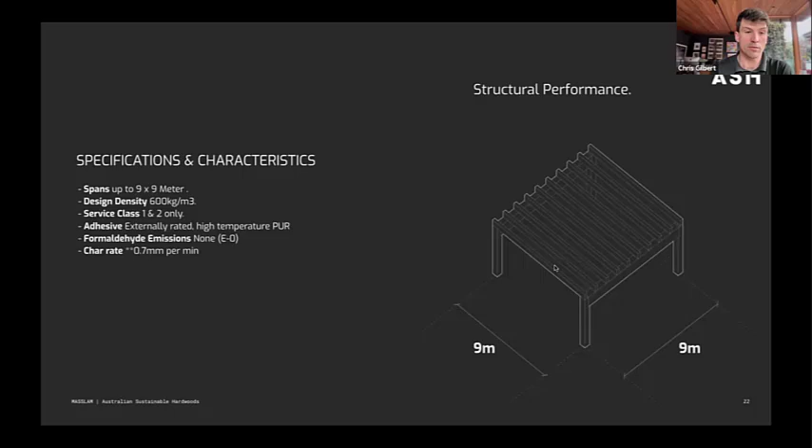When it gets into connections, there's a few different options. Obviously, simple supported is the most efficient, and that's what the images you've seen. And that's where we just land the joists on top of the primaries, and you can run services over the top. That's great. It's really efficient, but your floor to floors are higher. So when you start looking at residential and you've got that 3.2 meter height limit, floor to floor, let's say, or constraint, maybe this isn't so feasible.

So what we can do is we can semi-notch the joists into the primary. So that still gives you the ability to run some services over the top. Generally, you can run your duct for your range hood, that's 70 mil, 300 mil wide, duct over the top, because these are obviously at 800 mil centers. So you have 600 mil clear in between.

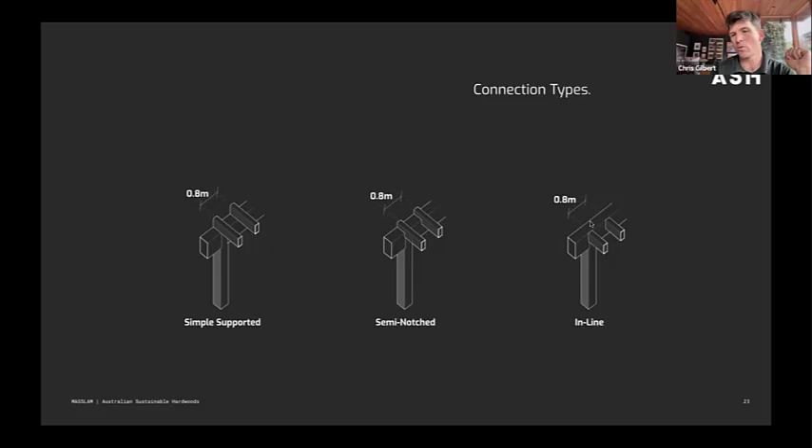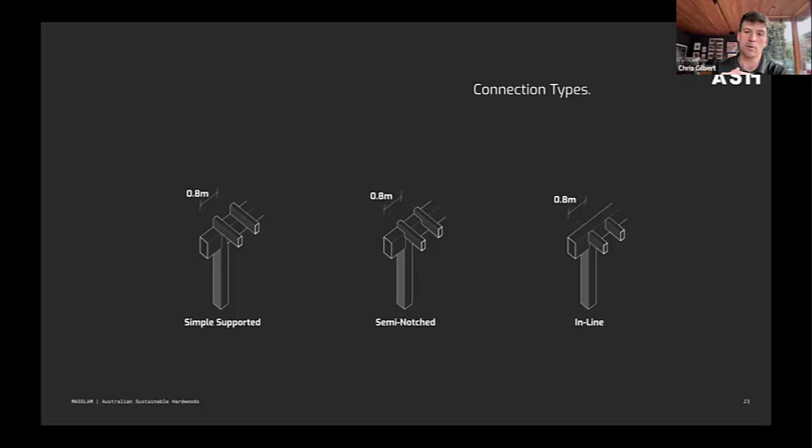But again, if you're still not hitting your floor to floors, we can put the members completely in line. So that allows you to tighten everything up a little bit more. We can notch the top of these primaries slightly to get some services through, like electrical conduits, et cetera, but obviously it just needs to be considered. And that's why we encourage you to reach out early to the engineers and myself, and we can help you work through those kind of things.

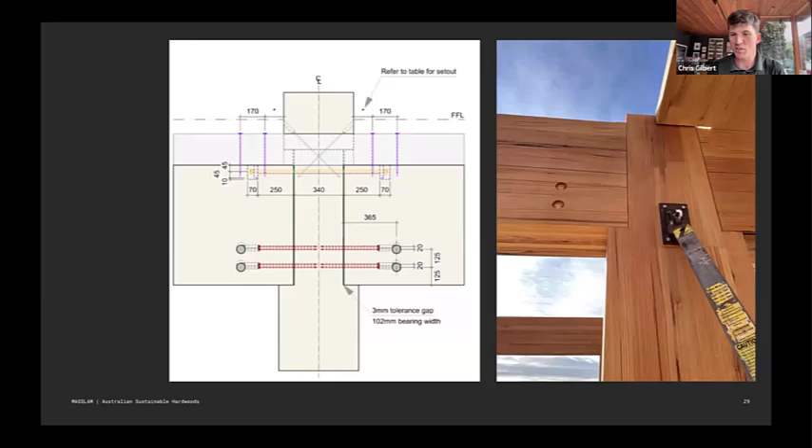Why we like this is it uses Australian timber to its full capacity. Australian timber is denser, so the char rate is lower. So you can use a really small bearing connection to transfer the load of this beam through to the column without a fish plate. What I like about it is it's kind of a nod to the Australian timber and is also super efficient.

Here's some cost comparisons of fish plates. You're looking at around $1,800 per connection versus a simple bearing connection, which is around $500. So this is where some of the European suppliers might be cheaper for the fiber, but we can use those Australian qualities to pull back some of that cost and deliver a more local solution.

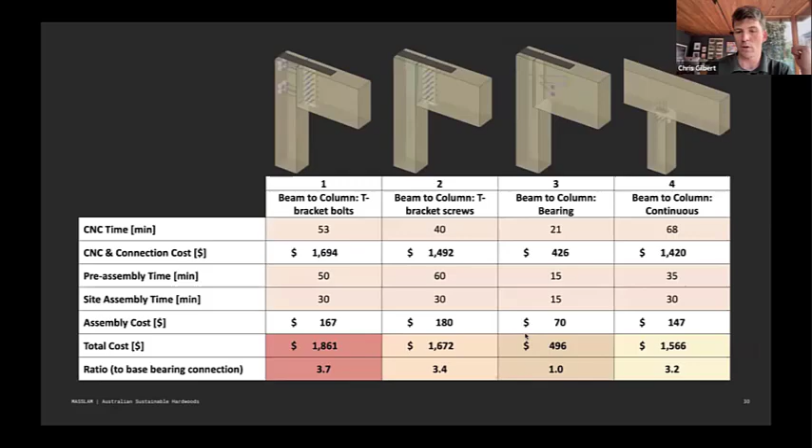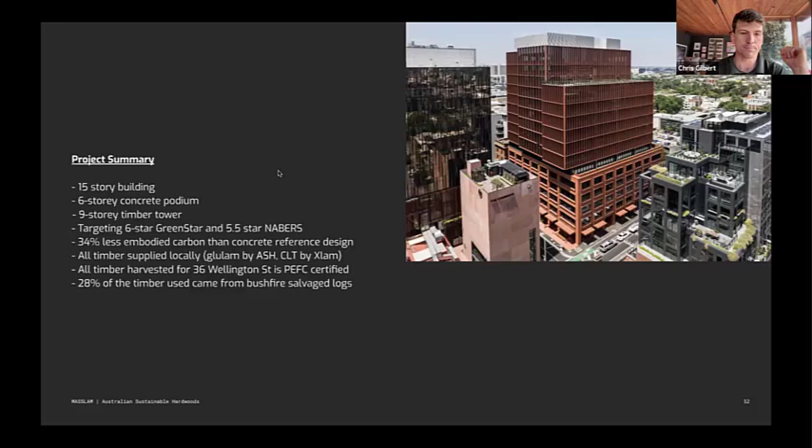What is also interesting is on-site works. For the lower 6 levels, there were 54 to 58 workers on site every day, as compared to the top 9 levels where it was 14 to 18. I was also talking to the architect the other day, Chris, and he was saying out of the 54 to 58 concrete workers, there was not one female, but almost half of the timber team were female. So there's this opportunity for a cultural shift to occur at the same time, which I think is really fantastic.

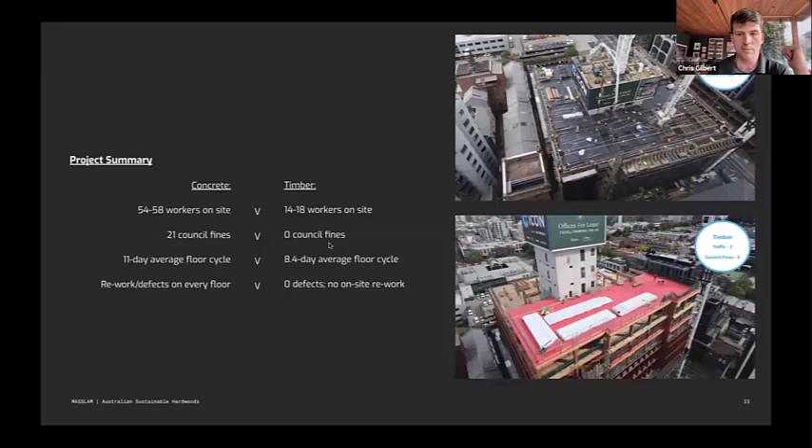There's an ingrained culture in concrete, which keeps it quite masculine and toxic, whereas the timber engineers who worked on this project said they've never had a more considered and curated project than this one. And it was because there were new people in the field, and it hasn't obtained a masculine cultural narrative, I guess. Also interesting was fines: zero council fines compared to 21 fines for the concrete, and the cycle time was much faster.